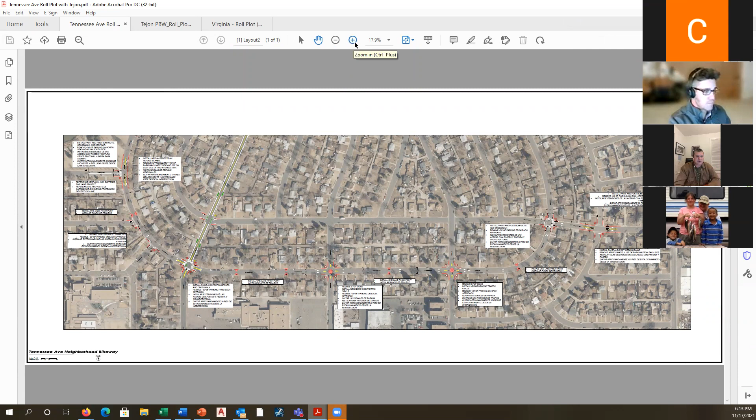The bit.ly/WDSS comment site - I spent about 3 hours on there last night. Oh you did, did it work for you? It's better than it was. The last meeting I couldn't do anything on there. I was told they would be making improvements, and the next thing I know, I couldn't comment anymore.

I apologize. I'm going to take full advantage of it, which brings me to my first question - how long are we going to be able to make those comments? Okay that's great, so comments for these corridors will be open until December 19th.

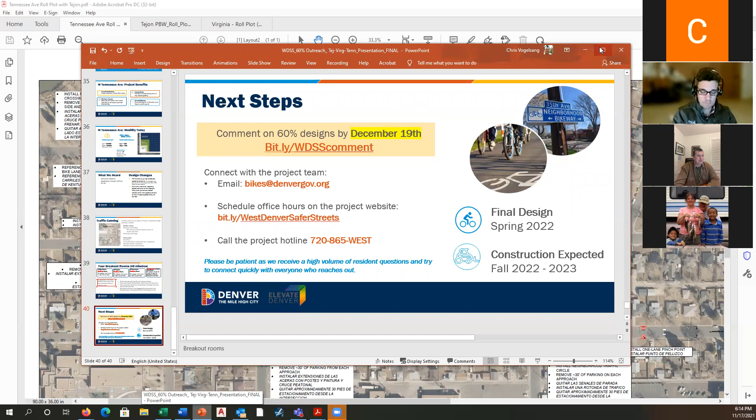Let me just show you that information so you can see it and write it down, I'll give you the end date. So December 19th the comments will be open to, so feel free, you can do it through the Konveio. I know you said you had trouble before, hopefully it'll work better this time. You can always email us, go to our project website, or give us a call - those are the ways we can get in touch with you too.

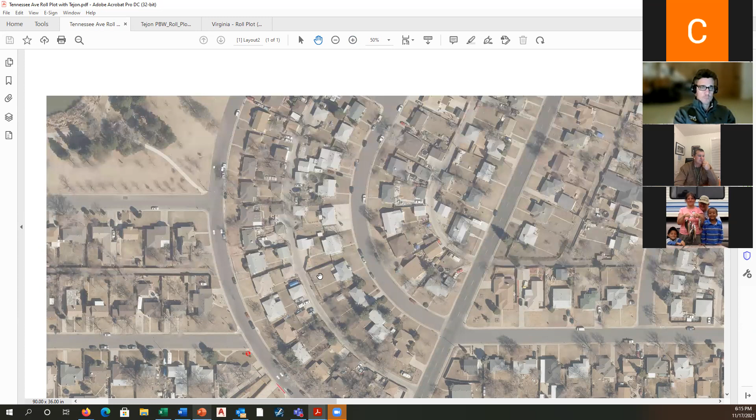Yeah, my old slow computer doesn't keep up with this at all, so I'm using the phone, and some things you can do and some things you can't. To look at the map, I had to turn the phone long ways to select where I wanted to comment, then I had to turn it the other way to get the text to fit so I could see what I was doing. I haven't gone back today to see if it updated, but yesterday it wasn't putting my comments where I had selected. Somebody sent me an email and said it was closed, so.

Okay, if you added comments, we can just go look together too. I'd rather discuss stuff and we can do that later. Okay, yeah, I live on the corner of Tennessee and Quivas.

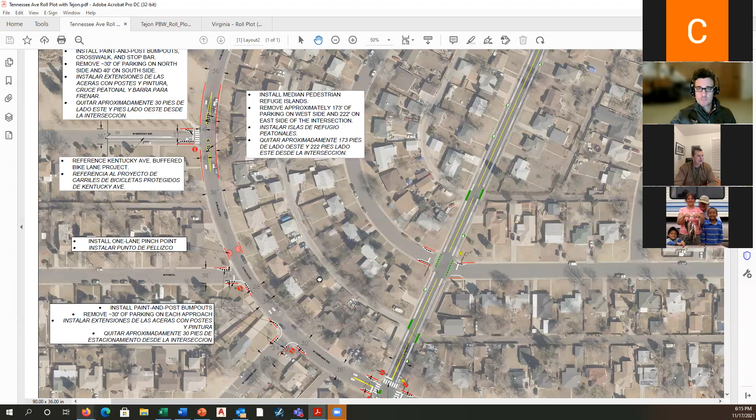Obviously I'm not - the city came last summer and took away all my parking, or all but one parking space on the east side of my house. This will take away virtually all my parking on the front because the neighbor has 3 vehicles, they park out there. So basically I'll be fighting with them all the time to keep a parking space there. We also have the apartment buildings parking up here, because the apartment building charges, I believe it's $80 for an extra parking space.

So the parking right here on the corner is very tight, and you're going to eliminate the rest of it, because you're going to take the one spot left on the east side, right on the corner, and where I park now will be gone. Am I in the right spot? Is this Quivas?

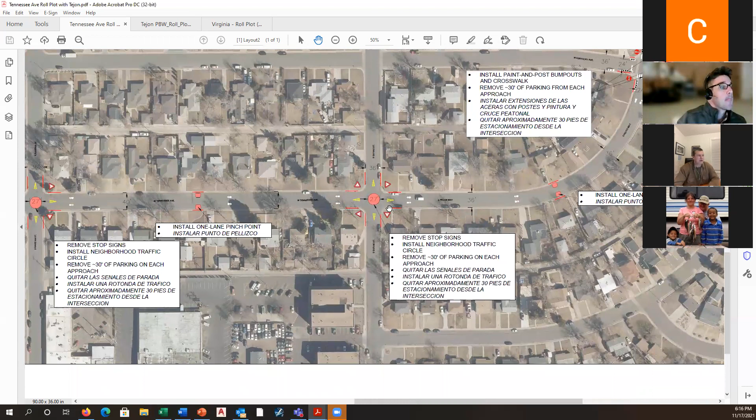On the phone things are kind of small. Oh, I'm sorry, you're on the wrong map. Gotcha, it's the one in the middle. Yes, thank you, Chris, it's with the traffic circle. Right here, sorry, which is another one. You're on your phone, right? So it's hard for you to see what I'm looking at, but I'm looking at the right place now.

When it gets all filled in here, it will be. Right.

Quivas and Tennessee, you live right on the corner of that intersection. That's what you were saying. And there was some parking that was removed earlier. And now with this design, the parking right in front that you've been using will be gone as well. Yeah, literally I'm on the southwest corner, right there in front of the park. So right now I park from my sidewalk forward, and that's where you're taking the parking.

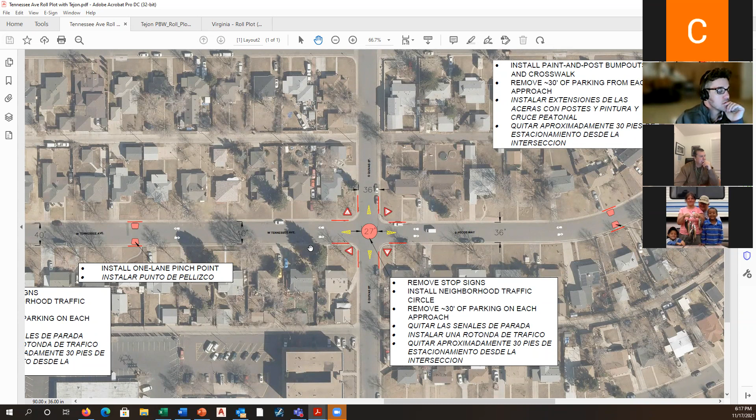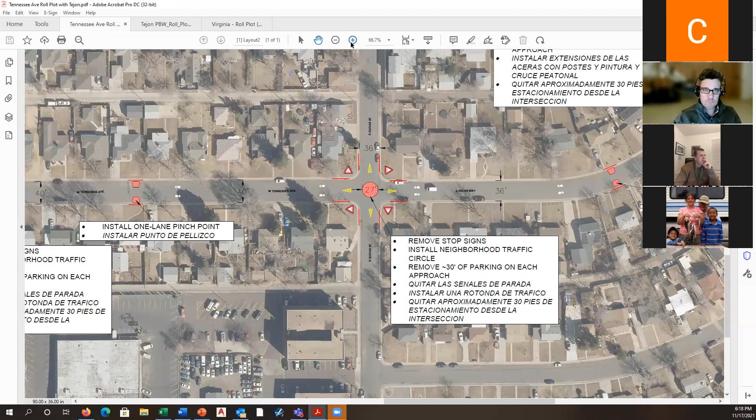And then there's a parking space that remains right where the no-parking will be on the east side as well. Right here, no, you're on the wrong side of the street. Your house is here, and then I think you said that's where you park now. And then you were saying the apartment complex, also people spill over into the neighborhood. Yes, it's cheaper to take a chance paying the $50 parking ticket than it is to pay the $80 a month to have an extra vehicle. Gotcha, I'm allowed one, so.

And then the neighbor now has a food trailer, so he has employees parking out here. The neighbor, second one from the corner across the street from me, has a concrete construction type business, so he has employees parking there too. It's getting increasingly hard around here.

But I'm very concerned about this turnabout, especially since we're going to have one on both ends of the block. As you can see in my driveway, I have a 26-foot travel trailer. Not to mention we have fire trucks go through here every day, some days 5 or 6 times a day. We're also on a school bus route, I think 3 different school bus routes come through here, and we have a lot of large vehicles that go through this intersection.

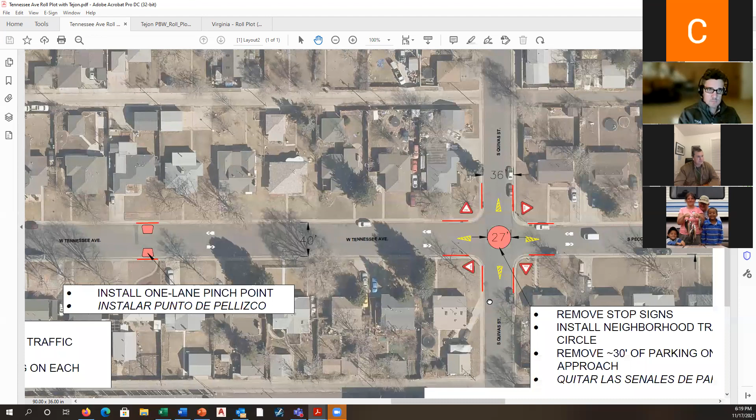Okay, that's good to know. Just for some background information, you can see the size is 27 feet - that's pretty specific for this circle. That size is based on making sure fire trucks, and maybe not over-the-road semi trailers, but bigger trucks like single unit trucks, can get through this. But we'll want to make sure the designers are aware of the frequency of use here and maybe take another look at this to see if that's the right size for trucks to be able to go through.

But also, the whole point of it is to get people to slow down. You did see that data that there's quite a bit of higher speeds on this corridor? I'm very well aware of that, yeah.

As a retired city trash truck driver, I can tell you trying to make a left-hand turn through here would be nearly impossible. My pickup will barely make that turn, and anything bigger than that, it's not going to. I drive an extended cab 8-foot box pickup, so it's one of the longer ones, but that's pretty tight for bigger vehicles.

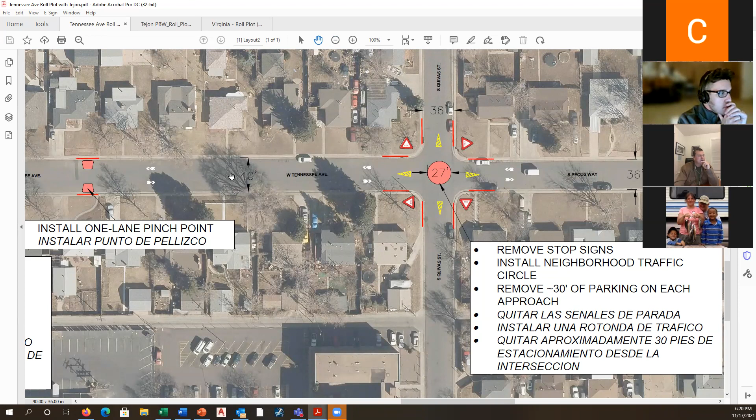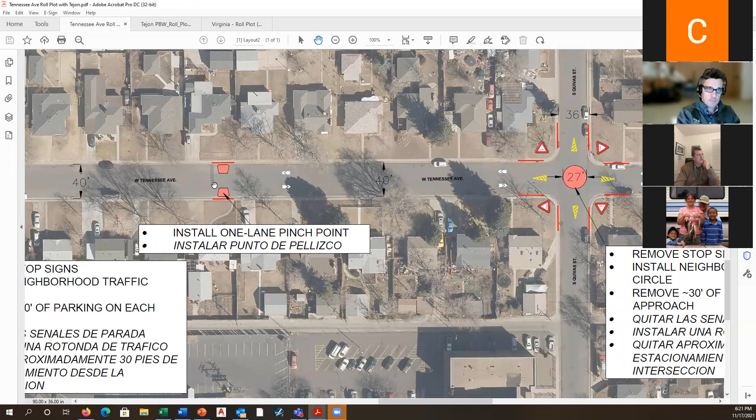And you brought up the mention of speed. Originally this was set up with speed bumps, which I'm not a fan of, but I understand. But these pinch points, I think, are going to create just a gap for them to drag race through anyway, so I don't think they're going to reduce speed. I actually think you're going to make it more dangerous, because it's mostly pickups drag racing around here - he's going to be flying through there and somebody's going to be coming the other way. I don't know what kind of signage or early warning you have on these pinch points, but to me you're creating a worse scenario than the speed bumps. The speed bumps, I believe they would slow down for, but the pinch points I think is going to cause more problems.

Because I gotcha, I think I understood. They're going to be drag racing through the middle of it.

Who has right of way at the pinch point? Which vehicle gets to go first?

So it's kind of like, we liken it to, if you've driven the trash truck, right? Some streets in Denver are maybe 30 feet with parking on both sides, and the middle ends up being about 16 feet. So it's kind of a negotiation, I guess, is how it goes, depending on which one you're on.

To be honest, I don't know what the uniform traffic code says about who specifically has right of way, but it's probably whoever arrives first. I think if you have a wreck there, you're going to have a problem with who crossed the center line, which there is no center line.

Jeremy, can you remind me, do you happen to know the dimensions of the pinch points? I know we want to maintain 11 to 12-foot lanes. Off the top of my head, I don't know the exact dimension, but I'd imagine if we've got a 40-foot street, it's going to be about 18 to 20 feet here.

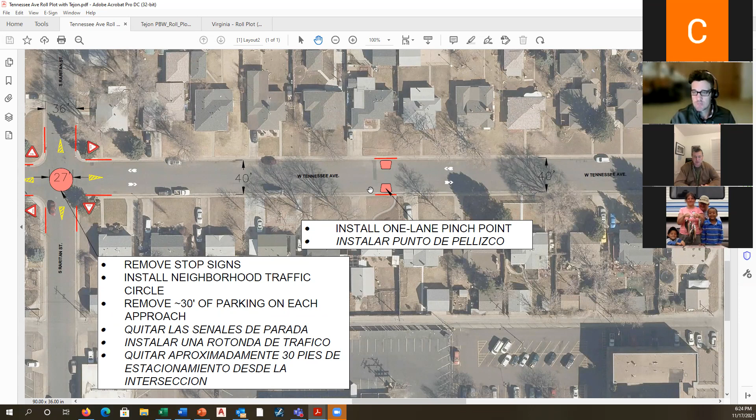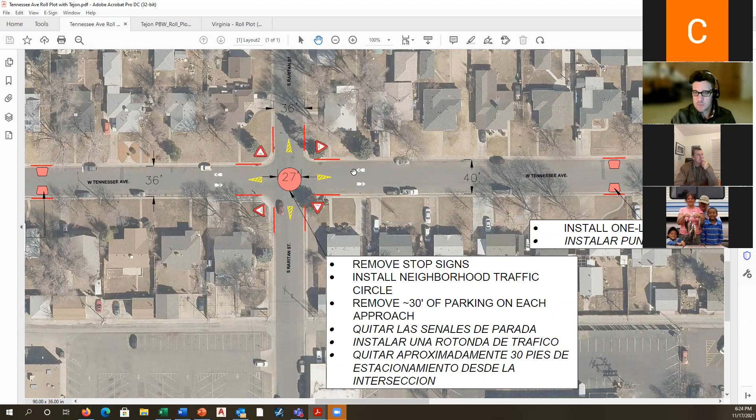You don't have to run them over to do what you need to do. And there's a turnabout at both ends of the block - if you knew there was a turnabout on one end and had a trailer, like my neighbor's food trailer, he could just come around the other way and access his house. But with one at each end of the block, if you've got a large vehicle, there's no way around it.

I think we should take a note that might be useful feedback to the design team, to maybe look at truck trailer combos - pickup truck and trailer. Those are probably on the order of 20 to 28-foot trailers, would be my guess.

That's good input, Roy, thanks for sharing that. These two streets are highly used by everybody coming into the neighborhood, because there's really not that many - you've got Lipan, then these two streets, and the rest aren't really through streets until you get up to Clay. So a lot of traffic comes into the neighborhood here, and almost all of us have campers or RVs or whatever.

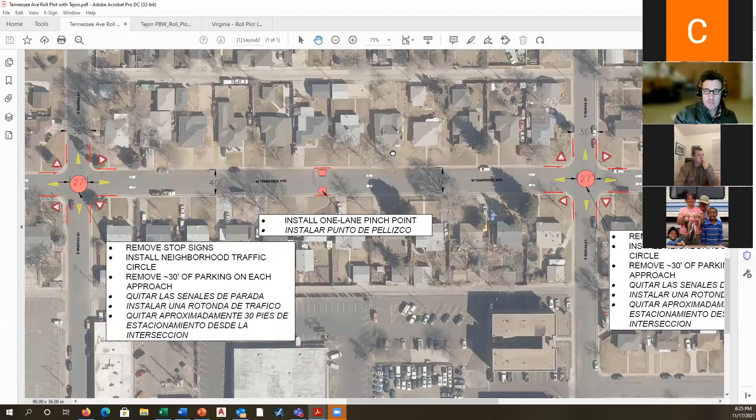Gotcha. Yeah, I think we'll take a look at that, because that kind of gets back to why we chose these locations, right? So if most of the traffic's coming in, we want to slow it down. So yeah, I think we hear your point loud and clear, and we'll pass it along and take another look at that.

Yeah, to me, a four-way stop with the cops showing up once a month to write a couple of tickets would probably accomplish what you're after. That's the biggest problem I see right now. It doesn't matter what you have out there, without a little bit of enforcement, and it doesn't take a lot.

There was a cop sitting at the corner of Clay and Huston Lake. He had a great setup, he did it like once a month. He'd sit there and write, I don't know, probably a half dozen tickets for people, mostly for running the stop sign. But after a while, people start stopping because they knew he might be sitting there.

Right, and I think that's an element that's missing, period, right now, is enforcement. Yeah, I know one of the philosophies with some of these devices is to try to reduce the need for enforcement so the speeds come down naturally by design, but kind of like what you're saying, it makes it more difficult to go around. What we want to make sure is that it doesn't make it too difficult to do the things you need to do every day.

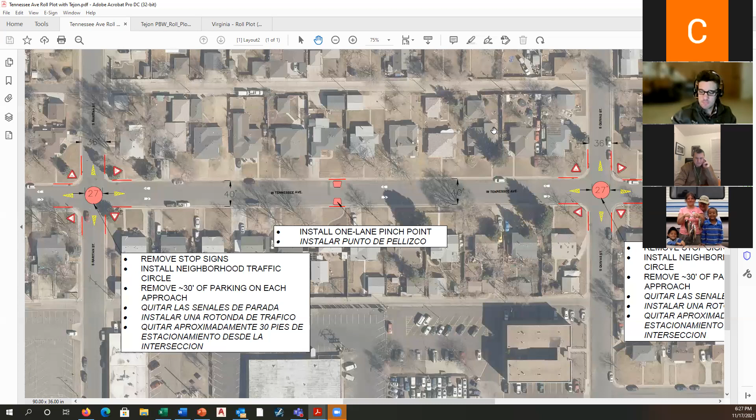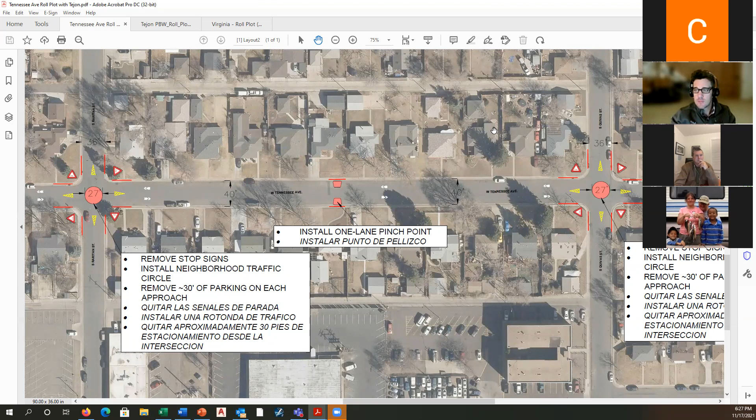And I'll give you a little more experience. Out at Lowry Sports Complex, the parks have turnabouts. They became like the favorite drifting spot, and we actually had a lot of accidents there. Hopefully that doesn't happen here because I really don't need cars in my front yard.

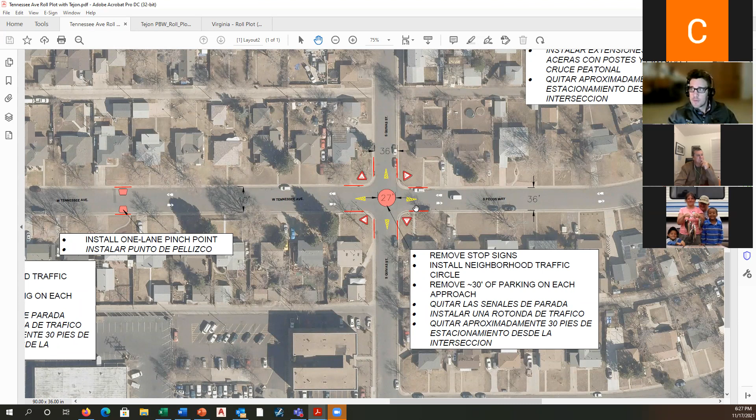Right, and there were a lot of people that would come in there with too much speed and literally get launched. They were landing at one turnabout there. I have a dumpster that sits just past the turnabout, and they were landing almost on top of the dumpster. They were getting launched that high.

Wow, yeah, it's funny you mentioned those. I helped with those. They were some of the first roundabouts done in Colorado, and I think there's some things we would do differently about them. They're a little different than these, more like big intersection roundabouts than these mini ones.

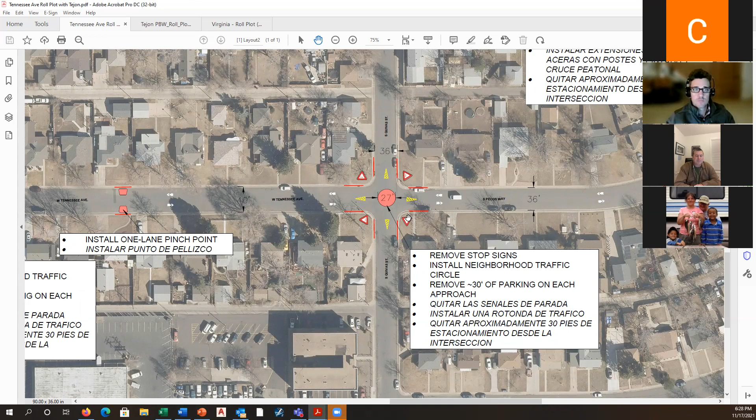But I understand, I'm not talking about the ones out on... Oh, you're talking about in the neighborhood. No, I'm talking about small ones like this, they were in the park. In the park, yeah, I didn't have anything to do with those, I only had to do with the big ones. The bigger ones out on the street, once you figure out how to use them, work pretty well. But in the park, they actually have two of them, I believe, that are more like this size.

Yeah, gotcha. Yeah, it had a regulation for a 35-foot vehicle on it, so that'll give you kind of an idea. Gotcha, okay.

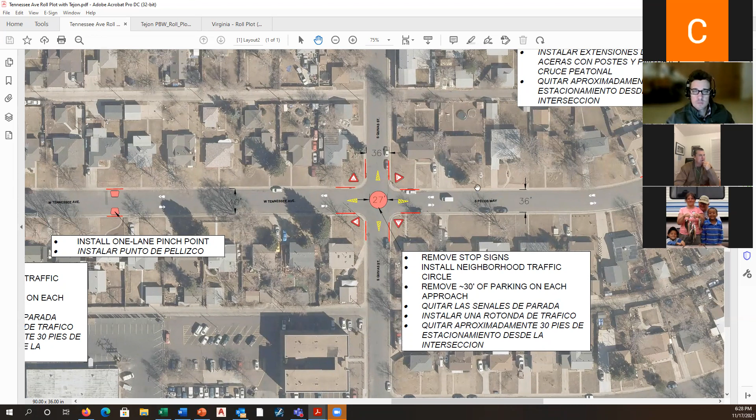Okay, are there, what else should we talk about? During the pandemic, I saw enough bikes that I started to think it justified some of this. But since the pandemic's reduced, I'll call it, we're back down to maybe 3 or 4 bikes a day, and most of them are e-bikes. They're on Quivas and they're hauling ass.

Oh, I think I saw you, I was kind of looking at the chat. I think I saw you made a comment about that in the main room chat. Especially on the hills, like on Kentucky, where you're going down into Lipan, over by the school on Tejon. Those are pretty steep hills. If you just let your bike roll, you're going to be moving.

Right, and I mean, you guys are concerned about car speed, but bicycle speed, you know, if you're in a car and you pull up just a little bit to see, and you stick your nose out in that bike lane and he's hauling butt, it's all over.

Yeah, right, if they're around that edge. We are trying, so to your point, yes, we want everybody to go reasonable speed - the bikes, the cars, the trucks, everybody.

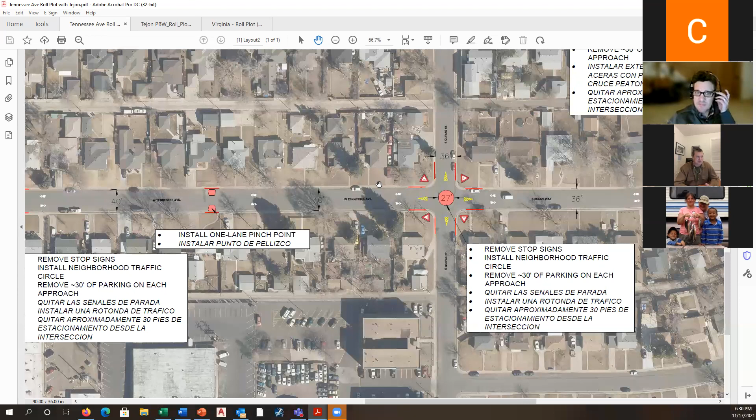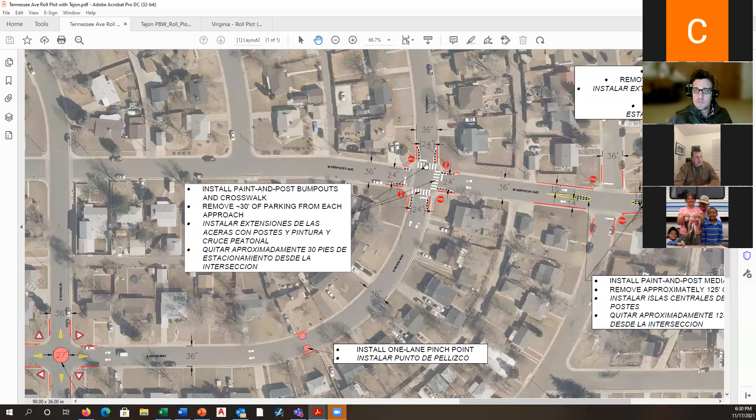And then we are doing, I know you talked about removing this parking. Even at the curb extension intersections, we're doing these 30 foot parking removals to sort of daylight those intersections so you can see better, so there aren't cars parked right up. That's one of the reasons. And I know you said that is a negative for you - that's the reason those lines are there.

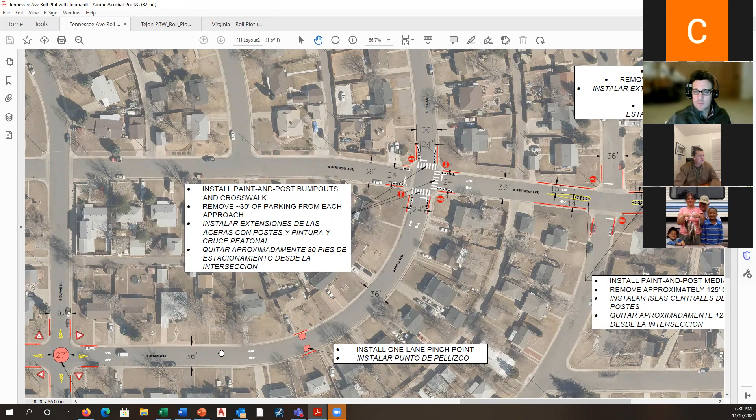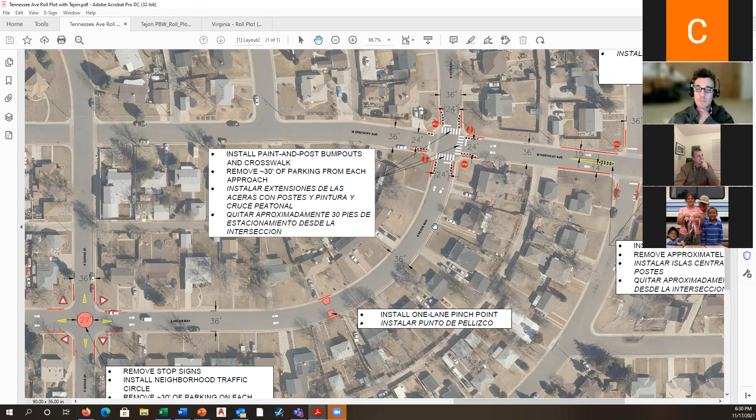Yeah, I understand that, but I also understand if you go just around the block, just east of my intersection, the very next intersection, there's a big old tree there, you can't see nothing. So you're still gonna stick your nose out there. So even though you daylight it, it doesn't mean that you can see.

Yeah, right, if there's something in the yard that prohibits you anyway. Are there other parts of the corridor? I mean, you know this area really well, it sounds like. I'd love to hear other thoughts you would have.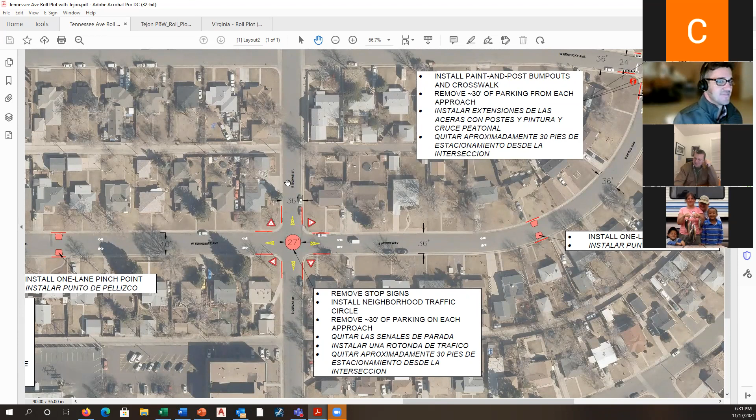Which one you want to talk about? Well, start at the top - the pedestrian island, just like the one that's down on Tejon on the north side of Alameda. To me, especially as a truck driver - I'm retired from that now, but as a truck driver - that was the biggest pain in the ass there was.

And I actually almost took out a bicyclist there because the bicyclist came out of the alley just as I approached that intersection and was right at my rear tires. As I crossed over there, of course I have to move to the right to get through there, and I damn near pinched him - it would have been all over for him.

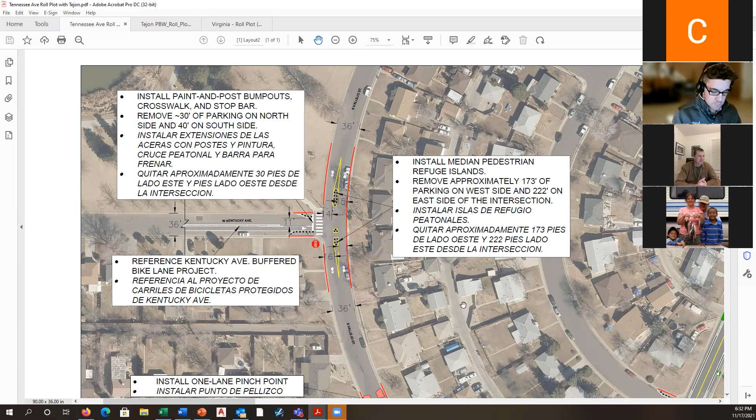That was the Tejon and Alameda one you're talking about. Yeah. But yeah, I know, still it's the same concept, same idea.

Sorry, again, we have a lot of people walking their dogs and they're going to be using your bike lanes, I'll tell you that right now, and that's going to be a problem. But for these pedestrian islands in the neighborhood, I don't see it.

Like the one down here on Kentucky, I believe when the road gets slick that one's going to be an issue - the snow plow is going to have to get through there because they do plow that with the big tandems. When it gets slick, people are going to be sliding into that. So I think it's more of an obstacle than a help. I do understand you want to slow people down, but again, the speed bumps - I think four-way stops with a little bit of enforcement would do a lot of this.

Okay, yeah, and I know you went through this before at the last round. So the symbology - the little black dots are those raised posts, right? And the white and yellow are stripes, and the red is where parking gets removed. Just making sure we're on the same page.

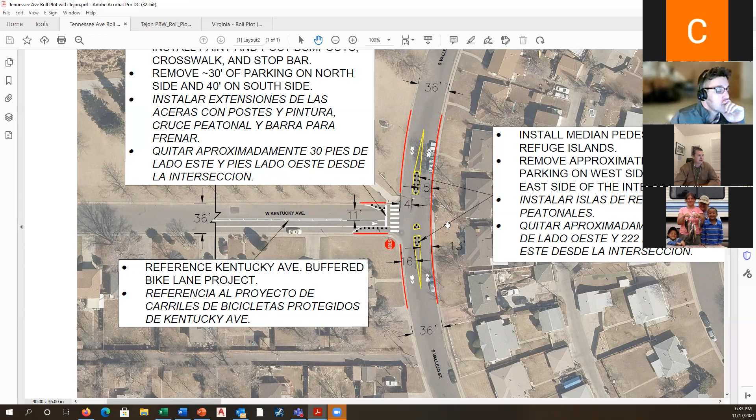Yeah, and the posts bring up the street sweeping issue - the street sweepers can't get in there and keep it clean, so it's going to be dirty. They did a study a few years ago about our air in Denver, and at that point it was largely dust, and Public Works went out and bought different street sweepers to address that.

Well, now we're going to go right back to that, in my opinion, because we're going to have all this dirt laying around with all these posts. And then you get the grit on the road and the bicyclists go through it and they can wipe out on it, so it becomes a safety issue for them - not so much for cars and trucks, but it would.

Yeah, and just to clarify, the street sweepers could sweep the lane, but this middle spot they clearly can't get into - or where you've got the posts, or the curb extensions either. Yeah, anywhere that's blocked by posts.

And I, as a driver and occasionally a bicyclist - I don't ride a bicycle like some people, I ride it occasionally - I don't want to be pinched into a car. I want to have room to get away from that car. Which the posts, if they're far enough apart, you can go behind them on a bike and get away from the car.

Right. But to your point, at the pinch points, everybody goes in the middle of the street. That's the idea. Yep.

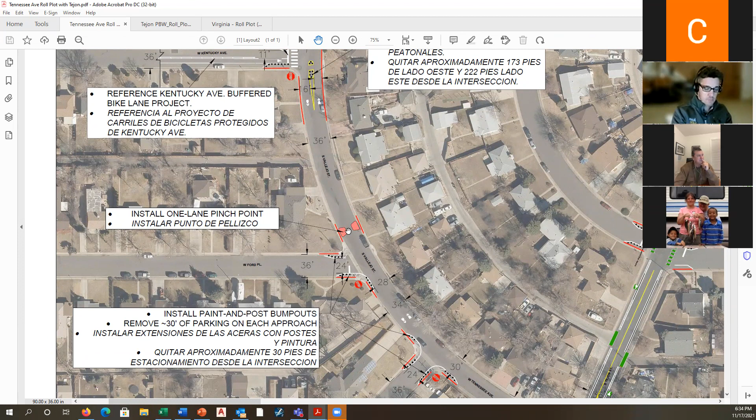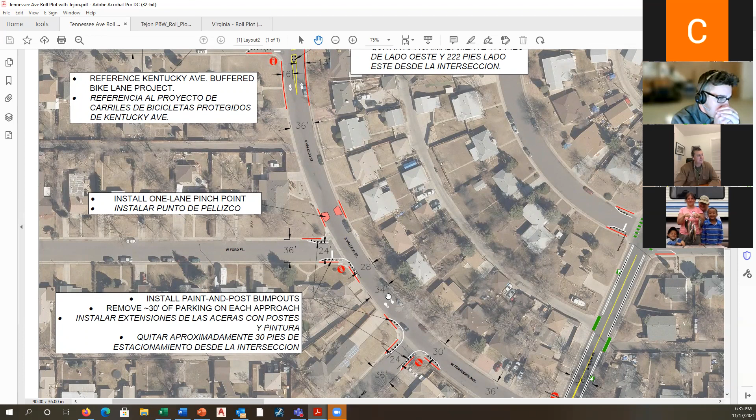I really hope that's not going to work the way I think it will, because there could be some pretty serious accidents there, especially when they're placed on the curve, just like the one you're showing here now. Right, because you have the blindness of the curve and then the pinch point. I don't know what kind of sign warning you're going to have for those. Should be something, because otherwise you're coming up on a blind pinch point, and you could have two drivers not aware it's there until too late.

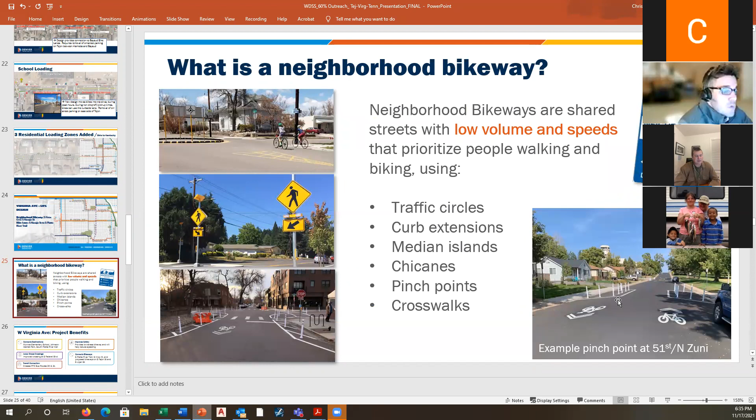Yeah, I'm trying to remember, we had a picture of a pinch point early here. I think that was in Virginia, maybe. I don't know if it showed the signing. No, it just shows the pinch point itself. There will be signs, and I can't remember exactly what they look like, but yes.

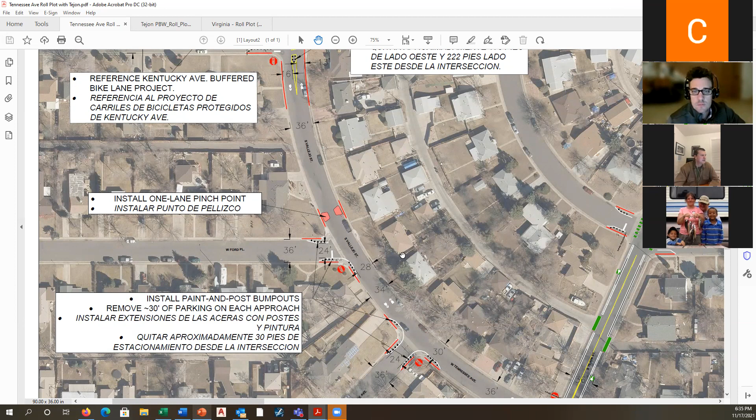Want to keep going through the corridor, Roy? Sure, sure. I don't know what you can see on your phone, but I'm just kind of moving to the east here.

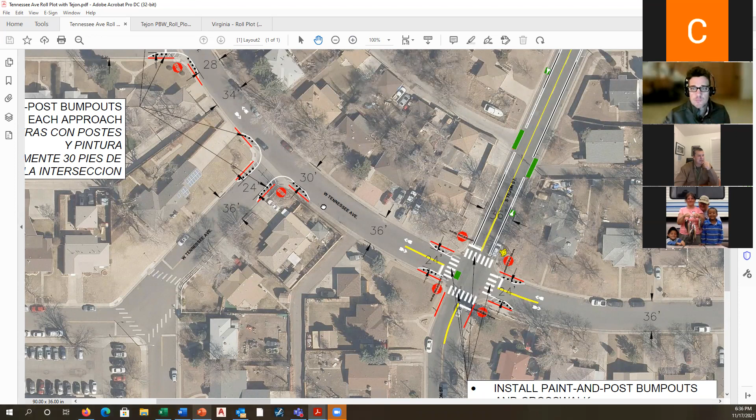Tennessee and Tejon, no, it's Tennessee and Tennessee. What I'm showing right now is Tennessee where Tejon intersects with it. Are you looking at this one? The Tennessee Avenue, the two Tennessees that come together? Okay, the bump outs on Tennessee coming from the park.

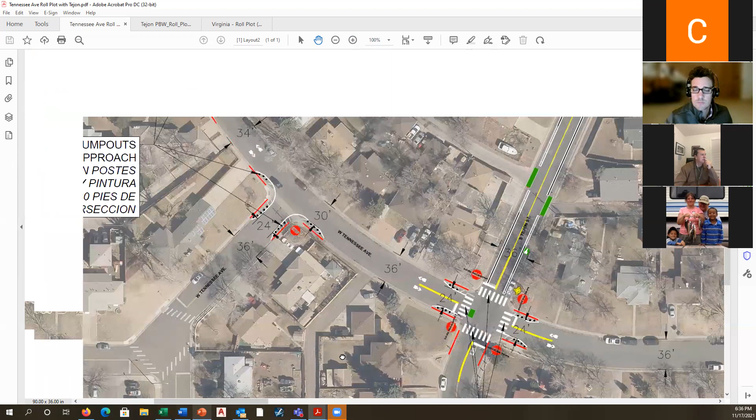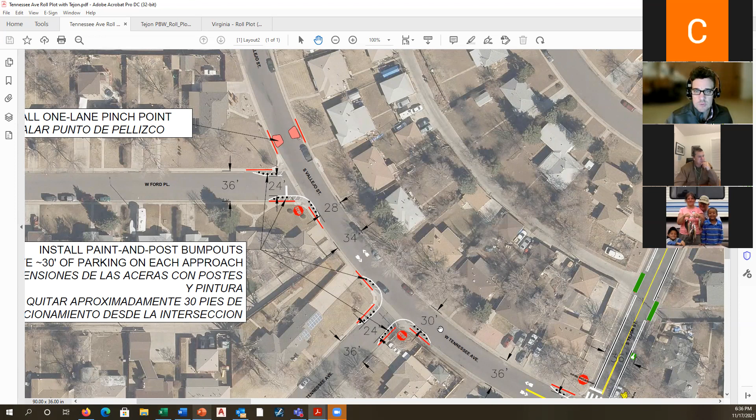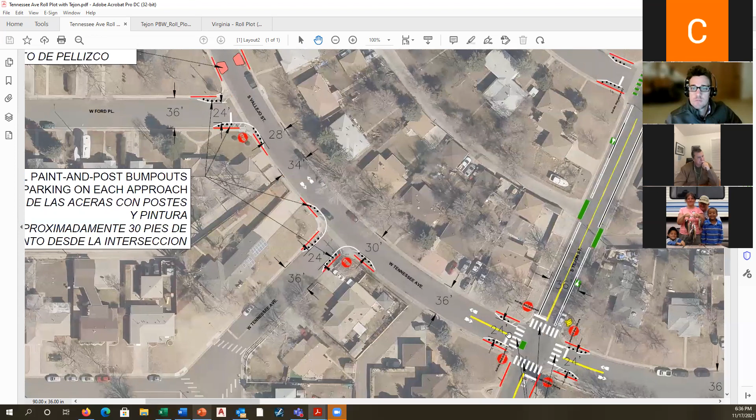So the 30-foot side, to me, those are going to cause another pinch point. Because it's kind of with that curve there. I don't know if the street narrows it or it just has that optical illusion that it narrows. But from there all the way around to the stop sign for Tennessee, it gets very tight there sometimes, especially if you got cars parked on both sides.

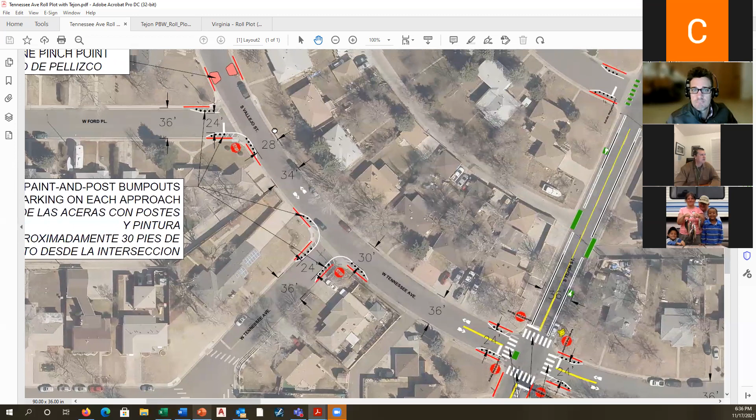Yeah, on the curves, even if it's the same width, it feels narrower, especially if there's cars parked. And the bigger the vehicle, then you experience off track, so you're actually taking up more room.

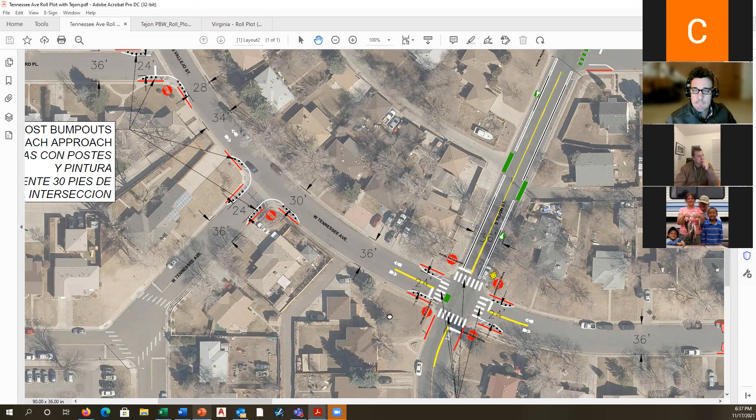Okay, and then I'm showing the all-way stop at Tejon. This is the intersection with the Tejon corridor that we just discussed too. Yeah, this is more what I think we need. Stop signs, a little bit of enforcement once in a while, just enough to make people stop and look, see if there's a cop there. That will get the job done.

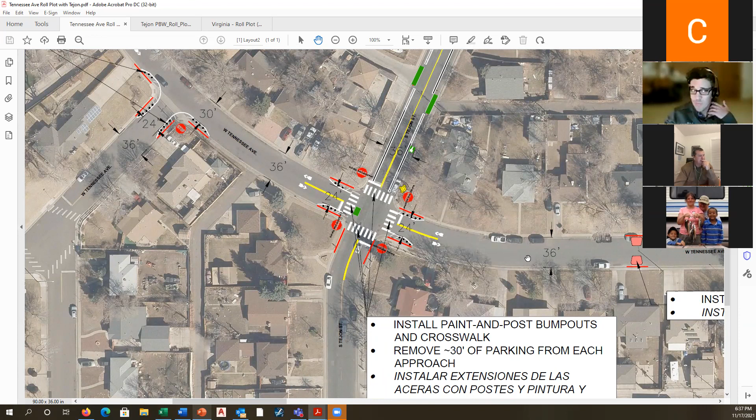And then originally you guys had speed bumps right down here, and now you have pinch points. Pinch points, yeah. I think Geneva tried to explain that, but we were hopeful that we would be able to install more speed humps with this initial phase. There's some still discussions with Denver Fire and emergency service providers, and so they kind of want to have a slower rollout and test them in a few places before they commit to doing them all over the city. I think that's the status of those.

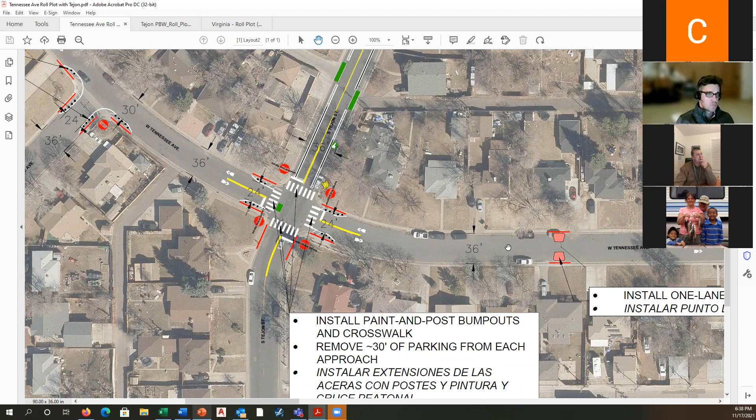I can see that. People think big trucks have high clearance, but they really don't. And then the ambulance, of course, you got a patient back there. You don't want to be slamming them all over, going over a speed bump. Right, and with the long wheelbase, sometimes you end up over the top. Yeah, and with the apartment building right there behind us, we see a fire truck every day, and sometimes it's 5 or 6 times a day.

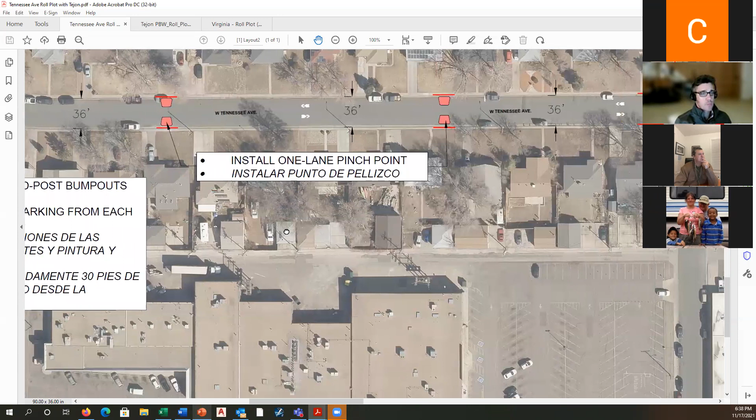And probably 3/4 of the time there's an ambulance that comes along too. We get a lot of police, fire, ambulance.

Okay, so Tennessee, one thing we talked about, we had a meeting last night as well about different corridors. One thing that came up in that meeting was reviewing Denver Fire's sort of main travel routes and making sure we're incorporating those. And it sounds like they use this Tennessee quite a bit.

Or not Tennessee, it's more Quivas. Because they're either more heading here, more north-south on Quivas coming into the neighborhood. If they're turning on Tennessee from Quivas, then they're going on this block.

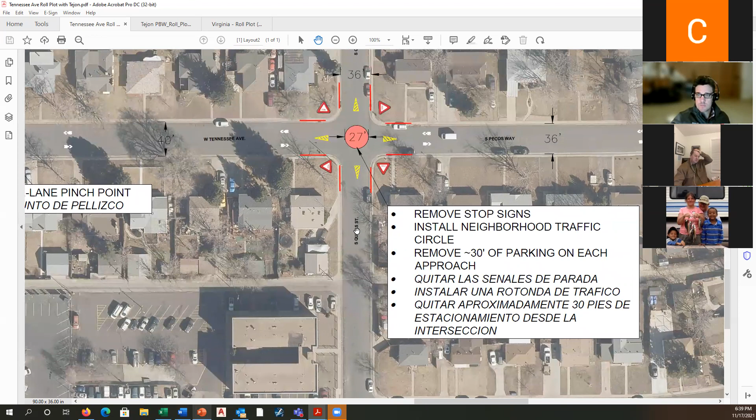Most of the time they're going to the apartment building, and they can come either direction to it. Most of the time they'll come off Mississippi. So then when they're returning to the station, they would be going through the intersection. Understood. Or this is also one of their main ones to go, like Pecos Way or the streets just up the road here.

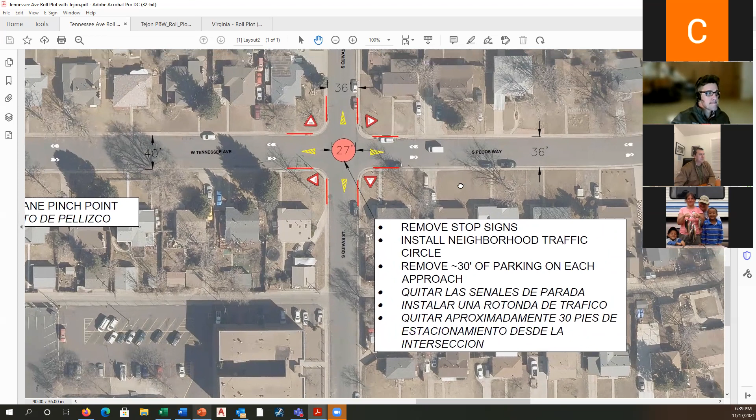So like I said, they roll through here pretty often.

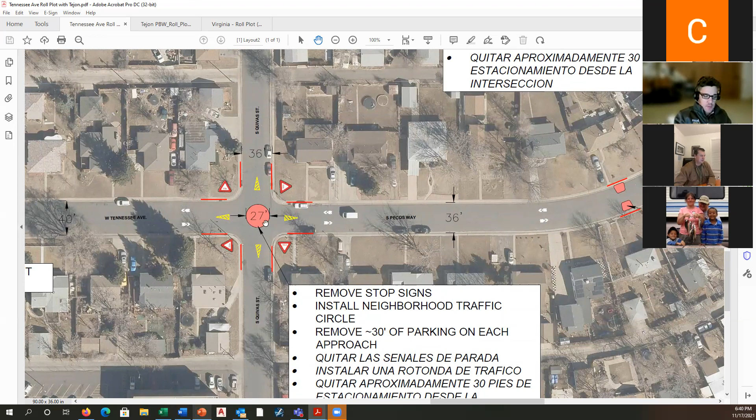We talked about right by your home here, what we call mini traffic circles, you call them turnabouts, same thing. We also talked about the pinch points, which will replace the speed humps.

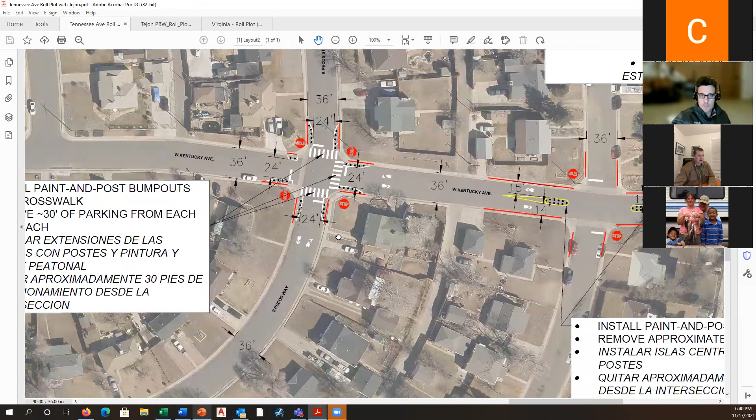And I don't think we talked about this end at all. I don't know if you had any comments. I guess we talked about these raised islands a little.

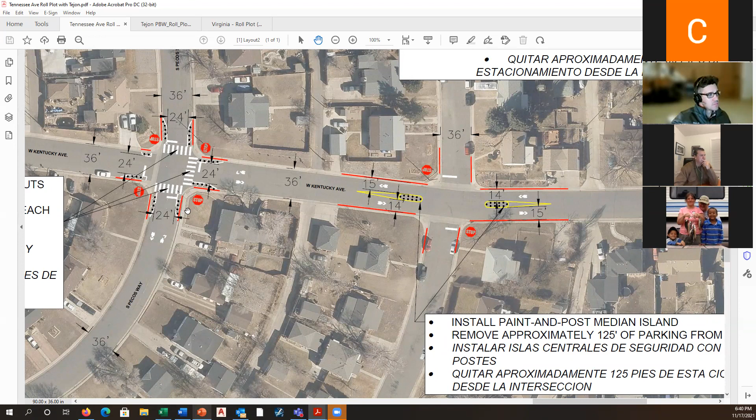The people who live on that corner don't park on the corner a lot because, as you can see, they've got significant driveways. Mine's a weird driveway—it looks big, but it's not really.

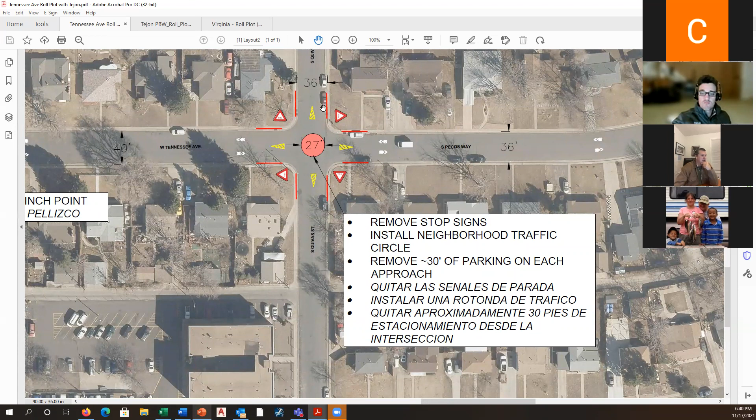Yeah, I saw it's at a pretty steep angle, maybe 60 degrees to the street. So do you back that trailer in there? You come up Quivas and then back in this way? Yes, and you've got it parked really well there by the garage, leaving yourself space. Because if I don't, then I don't get any vehicles in the driveway.

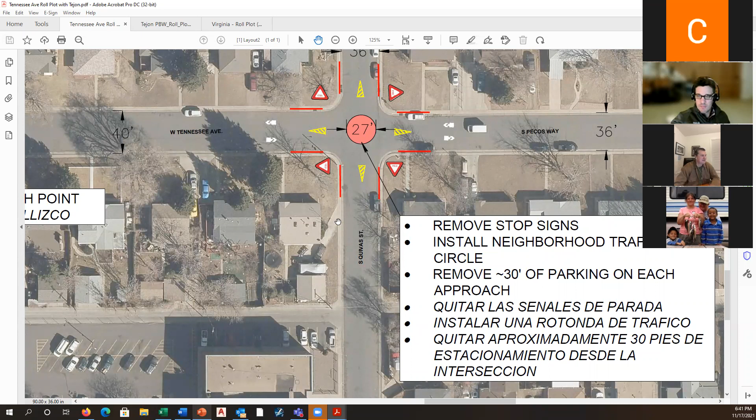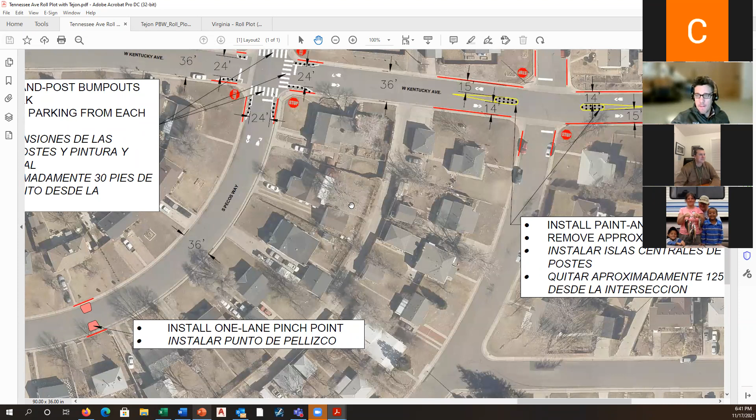As far as going down the hill on Kentucky, I'm concerned about the bike speed there, because I come off of Lipan up Kentucky to get to my house. I encounter not a lot of bikes, but a few, and if they're coming down that hill, they are moving.

Let me get over here—my computer's not cooperating totally. Give me one sec, there we go.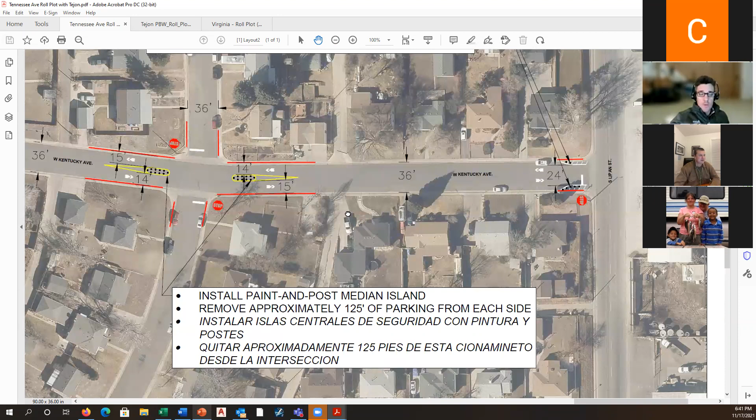So Lipan here, and there's a lot of topography here that you can't tell from the picture, so the speeds are high. And what you're saying is you've had instances where you've had to pull further out so you can make a good choice, and you end up sort of in each other's way.

Yeah, and that's the concrete company right there across the street, so you have commercial vehicles right there too.

We looked at Lipan in earlier meetings, and then we paused that—it was one of the proposed corridors as well. So we're taking a relook at that, stopping and starting from the beginning again to see if it still makes sense. Well, that's going to change a lot when they build the apartment buildings down the street.

I was just getting ready to ask you what happened to Lipan, because I was trying to comment on it too, and there's nothing there, right? So let me give you the 30-second high level.

Basically we got a lot of comments, and there were a lot of issues. The road's pretty narrow in a few places, with a lot of heavy truck traffic, and we were having trouble getting a facility we felt would be comfortable and safe—the impacts were pretty high. We got a lot of public input that, especially at that southern end, the impacts to the commercial areas and the new apartments coming were too much.

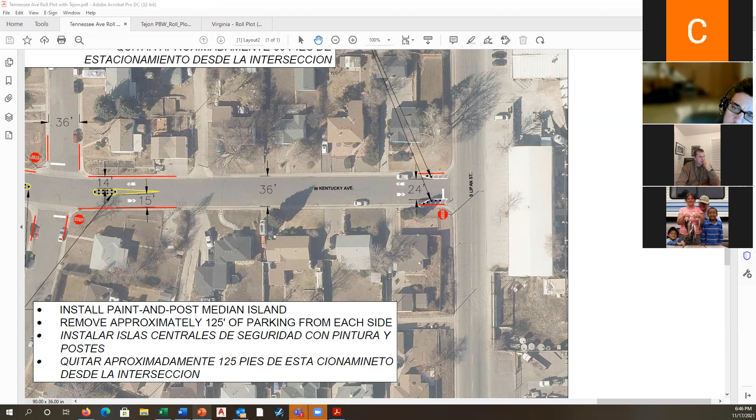Yeah, it is disappointing. I thought that was supposed to tie into some connection through the apartment complex too - am I misremembering that? Well, Exposition would, because Exposition right now doesn't go through from Lipan to Jason. When we build the apartment building, my understanding is that will go through, which would give you direct access to Jason, and to the park right there on the corner - a straight shot to the park, which gives you access to the Platte River Trail.

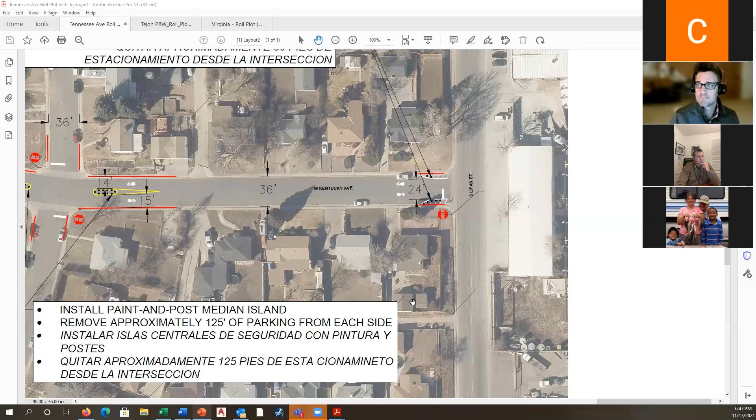So assuming that goes through, that's going to be an excellent connection for bicyclists and pedestrians. Well, I don't want to keep you longer than I need to, but I do want to make sure that we had a chance to hear everything and answer any other questions. Are there other things you were interested in about timing or what happens next?

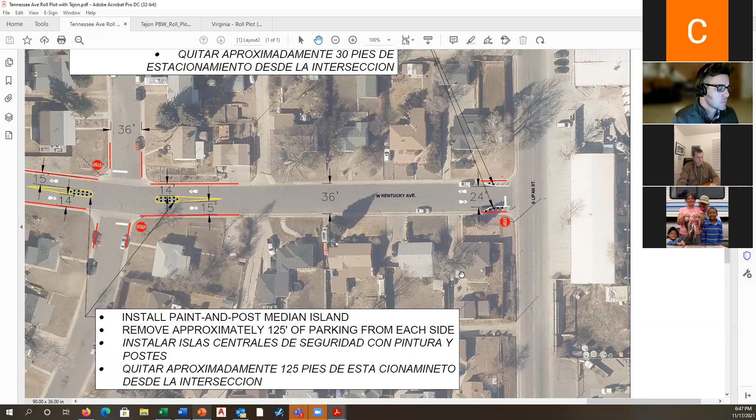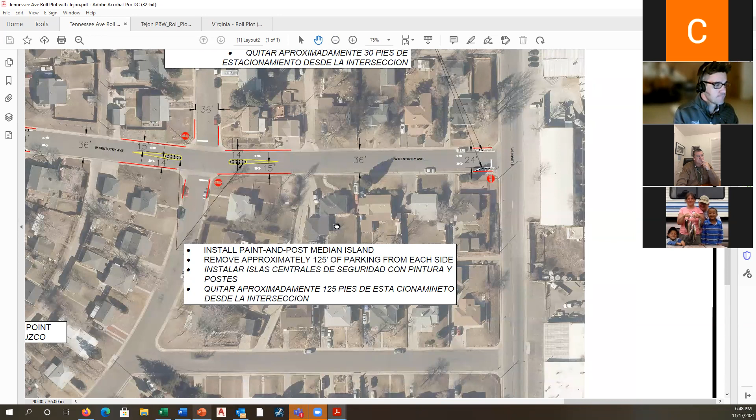My biggest issue is not getting - I signed up, I don't know how many, when I first got wind of all this, which was actually just before the second meeting. I signed up with everybody to get emails, and I don't get them. We should definitely dig into that - we've been sending them out, and if they aren't in your junk, we'll check and see. I'll just reach out, or I'll stop by your place and chat.

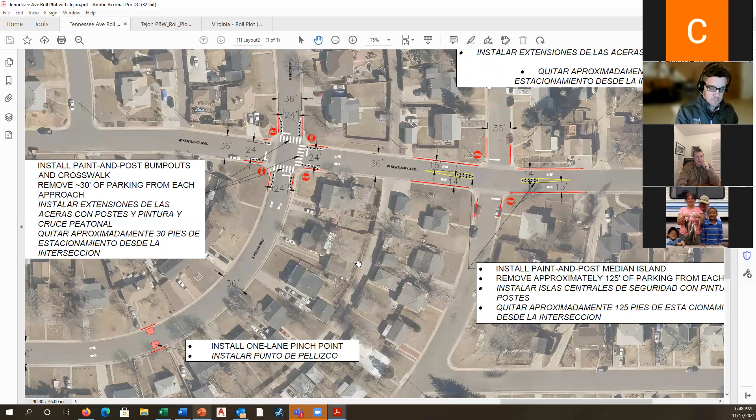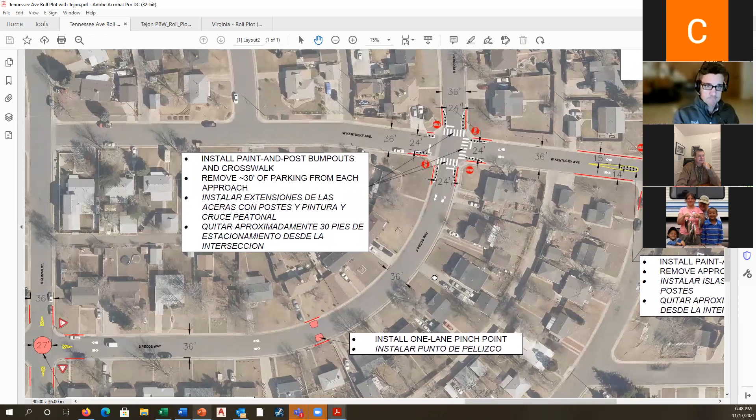Did you get a postcard from us, a mailer? Yeah, yes, I did get the postcard. To me, the postcard isn't really going - this is what we're doing. There's only so much room, right? But I think it could be designed where it grabs your attention instead of just something that gets tossed. Okay, yeah, we'll take that under advisement.

We will be, for our meetings on the Lipan and things - I know we're trying to do the same strategies. Because I talked to my neighbors and they have no clue. They just got it and were like, I don't know what this is, and tossed it. Yeah, or actually, if you look at it, it doesn't have a lot of information on it. It's kind of very general, it doesn't say it's impacting them.

So we got asked this the other night. We did the mailers, we tried to do the email. For places that are going to have parking removals, there will be direct flyering, someone will come and hand a flyer at the door that has really specific information, like parking is being proposed to be removed in front of your house, so you should know about this and please get in touch with us. So there are some more notifications that get triggered that are coming.

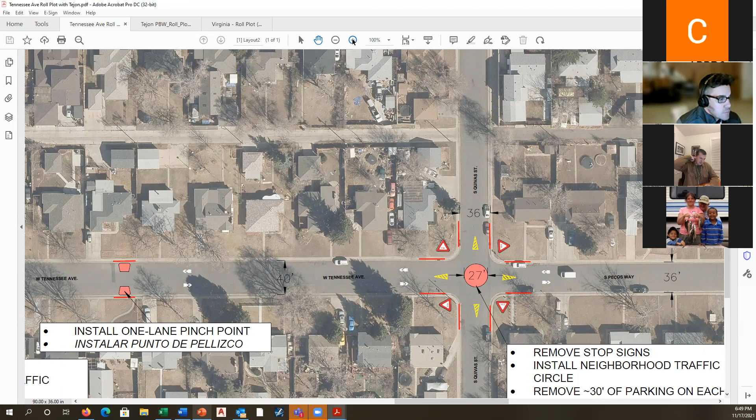But shouldn't that already happen if this is the last meeting? Well, this is our last public meeting, but the designs aren't completed yet, so we're still taking input, and then we'll finalize the designs. This is our last kind of public group chance to talk together, and then the other opportunities will be by giving us a call, giving us your comments, or sending us an email.

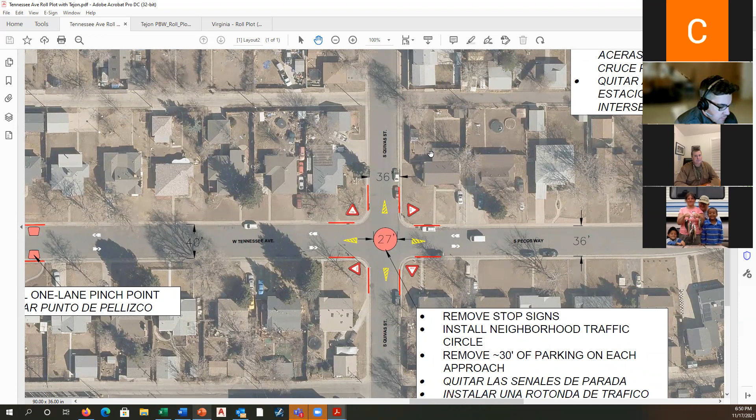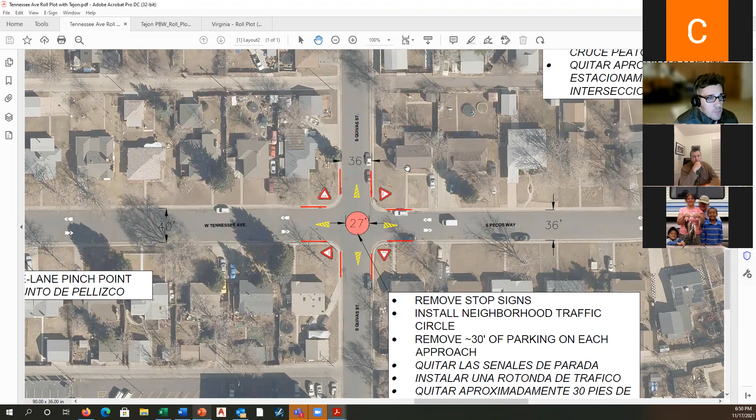That's right, to me that should have taken place before the first meeting, because then they'll have the full opportunity to put in their two cents. Like I said, I didn't find out about this till just before the first meeting. Matter of fact, I found out so close to it that I signed up with everybody, got the link, and was trying to get my computer to do Zoom. I had to download it and a whole bit.

Oh geez, well, you've been very persistent and patient and very civil. I really appreciate it. I know that's probably frustrating, and there are some things you think are not optimal about this, but I appreciate you giving us constructive criticism.

Well, like I said, I live here. I drive, or I did drive vehicles of all sizes. My pickup's still larger than most people drive. And I do ride a bike and walk here and walk the dog, and I spend a lot of time outside, so I do see what's going on out here.

Good, yeah, right, I'll put you on my list of people to come bug as we keep moving forward. And I might just drop unexpectedly by your house and knock on the door if that's okay. Yeah, no problem. Okay, I think probably we can wrap up.

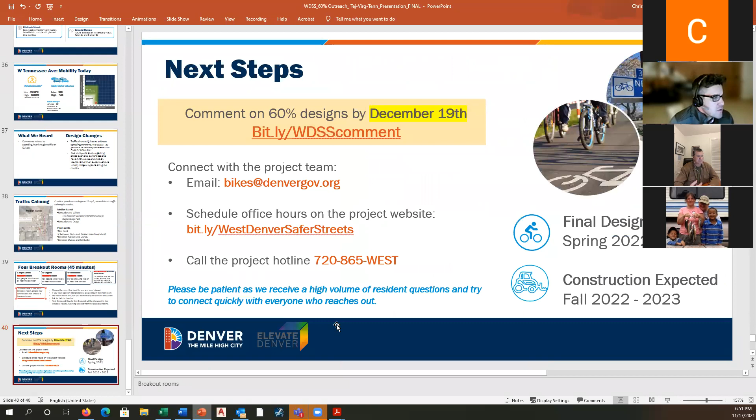I just wanted to share that, I know you have all this information, but since this is being recorded, people might watch it, so just make sure that people can see that info and what happens next. If there aren't any other questions or comments, I think our next steps are making sure you're on our email list, and then capturing your input.